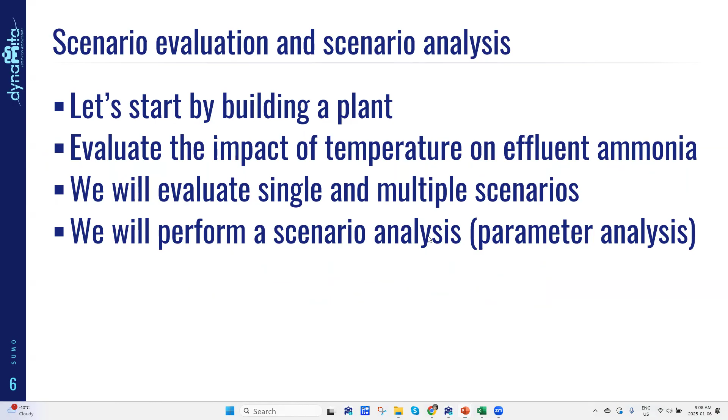All right, I have SUMO24 open on my side. I hope everybody can see it. Let me just get a few more people in.

The first thing I want to point to people is regarding the Wiki page. So if you open Sumo, you'll see that in the documentation tab we have a Wiki page. If you click on this Wiki page, it opens up a website. We try to keep this website as current as possible. If you're still using Sumo22, the documentation for Sumo22 will be available as a PDF right here. However, if you want to know what's new in Sumo24, that information is available. If you want to look in detail at the advanced simulation features we've included, that's right here. All the information regarding the new models, which I'll be touching on, is provided as part of this document. So I highly recommend looking at this document when you have time.

Okay, going back to the simulator - we have introduced this new tab at the bottom where we used to have one tab with all of our examples. Now we've created different tabs with dedicated examples. You can see, in the advanced mode, we have some examples that talk about the advanced features. All right, so let's go to the configure tab. In the configure tab, we'll start building a plant, and we'll build an MLE configuration to begin with, so I'll go to the flow elements.

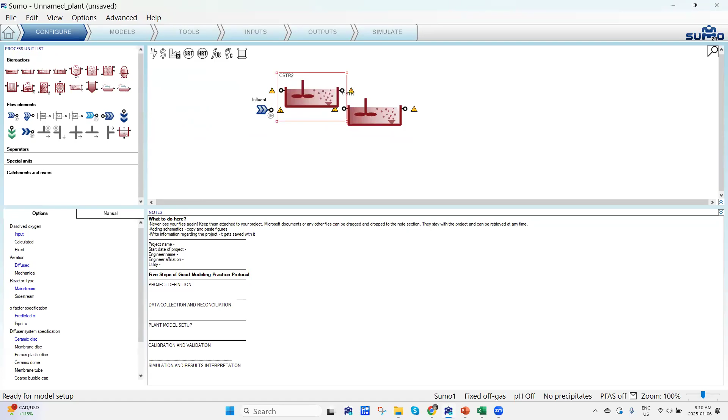I'll go to the separators and drag a primary clarifier, place it right after the influent, grab a secondary clarifier, an effluent port, and get a side flow divider so that I can recycle the nitrified mixed liquor from this tank.

I'll basically connect the CSTRs right here. I'll recycle the RAS back to the head of the CSTR, but I need a divider to waste my sludge. So I'm going to bring in a divider, turn it around, and then connect that divider to the input.

I'll use a side flow combiner, right click, and do a mirror up down. And then essentially let my primary effluent go into... I'll connect the influent to the primary input port, and then a sludge line right here.

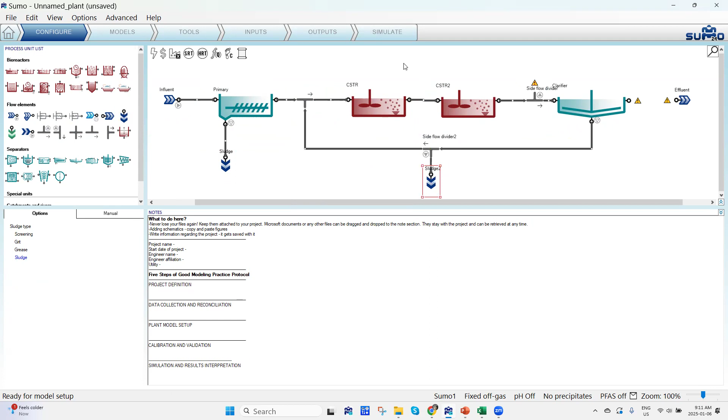What I'm missing is a divider which connects the recycled flow. So I'm going to just disconnect this pipe, right click, disconnect. And then I'm going to bring another side flow combiner and place that right in the middle.

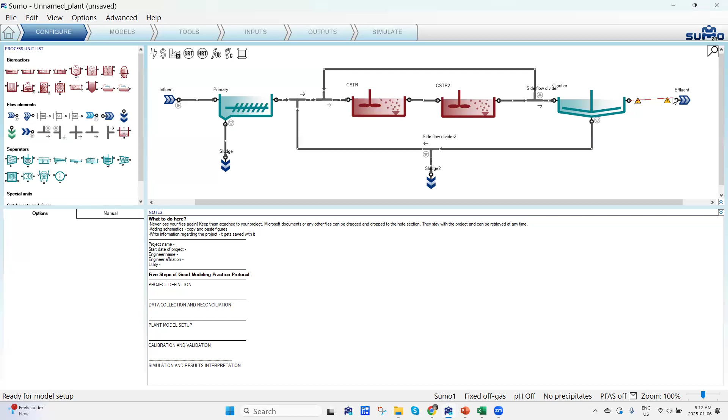So we have an MLE configuration setup. I'm going to click on the first CSTR and make sure I select the calculated dissolved oxygen model option. This model option will allow me to turn the airflow to 0 as an input so that there is no DO in the anaerobic reactor.

I will go over to my model tab. In the model tab, I have two-step nitrification, denitrification model selected as an input. If I scroll down, we have introduced a new option called micropollutants, where you can look at PFAS. So currently PFAS are not considered, but if I turn it on, then PFAS will be part of this influent model, and you can specify the PFAS concentration, and then you can track PFAS through the plant.

Let's go over to the tool. In the tools tab, we'll create an SRT calculation. So I'll click on the sludge retention time. I'll drag the two CSTRs to the numerator, and then the wastage or the divider along with the effluent solids to the denominator of this equation. And this allows me to create a total SRT calculation.

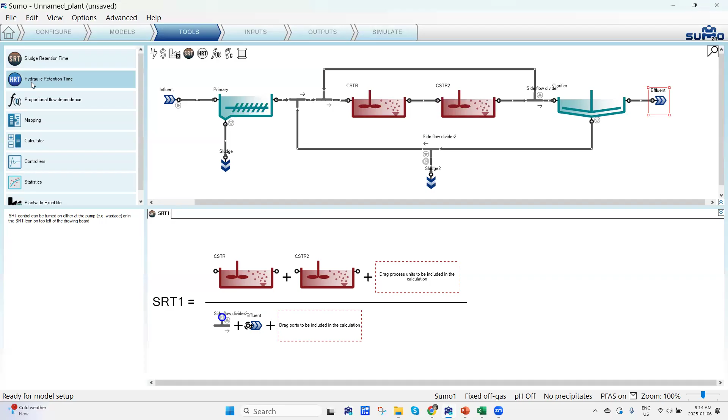Similar to the sludge retention time, we have introduced an option to calculate the hydraulic retention time as well. So if I click on the hydraulic retention time, I can select my reactor and then specify the influent at the bottom. And this allows me to calculate the actual design HRT of the system.

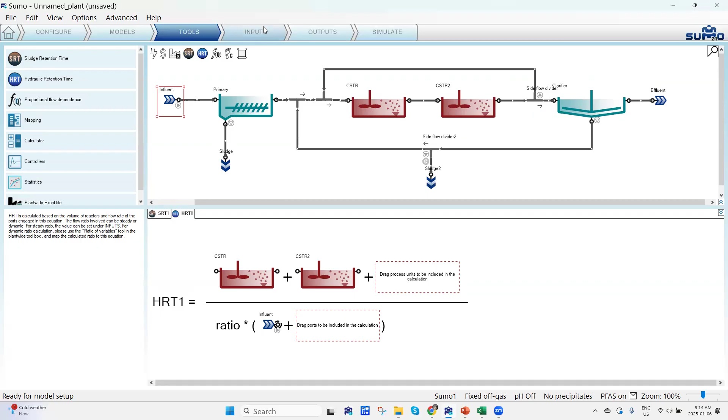Let's go to the input setup. In the input, if I click on my influent, and then on the left-hand side bottom, if I click on show all, go to other influent components. At the bottom, there is information which you can provide regarding the PFAS option, which we just switched on in the model tab. So if you want to specify PFAS in the influent and look at what happens when it goes through the plant, then you can provide PFAS as an input right here.

Now I'll provide volumes to my CSTRs. So the first CSTR is an anaerobic tank or an anoxic tank. I'm just gonna name it anoxic. The second is aerobic. I'm gonna rename that one.

For the anoxic tank, I'm gonna choose a volume of 3,000 cubic meter. We're dealing with SI units because we have people from all around the world joining us today. Specifically for people in the US, you can go to the options, unit system, and then select US units. So I changed the volume in the anoxic tank to 3,000 cubic meter.

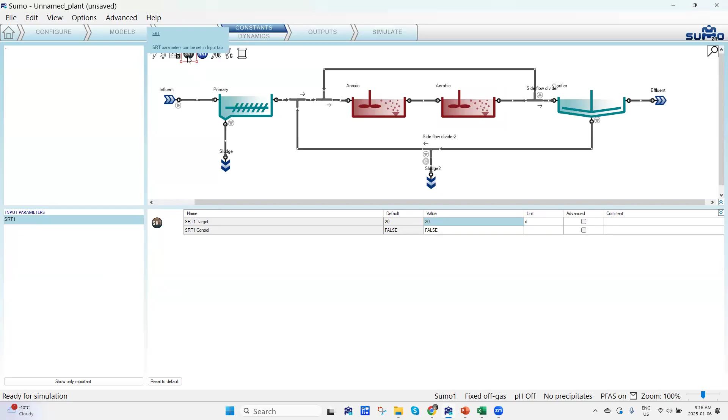I can click on my SRT on top of my drawing board, and this is the SRT calculation which we just created. I'm gonna turn on the controller so that I don't have to specify the wastage, but I can provide an SRT value, let's say of 5 days, and the wastage will be calculated by the model.

I can go to my side flow divider, although I can control this as well using the proportional flow dependence option in the tools. For now, I'll just provide a flow rate of 72,000 cubic meters per day.

Before we move on, I'd like to go back to my influent. Because this exercise is about some of the new features in SUMO, I want you to look at this advanced column. This advanced column exists for all of the process units, and it also exists for the model parameters. So if I go back to model parameter and click on my key parameters, you can see there's an advanced option, advanced column, where I can select any of these parameters. So wherever you see this option, you can select that as an advanced scenario.

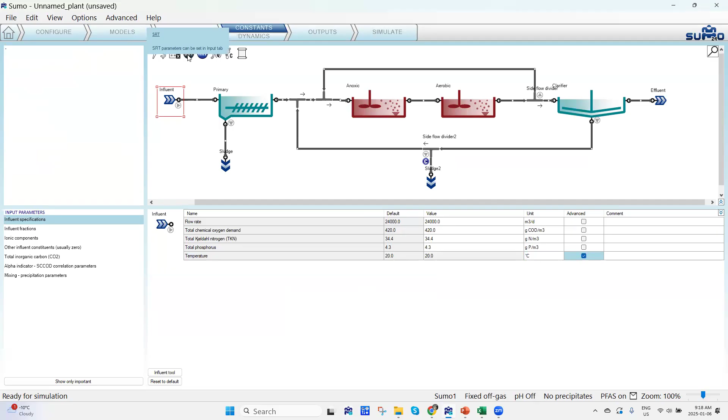I'm going to do the same thing for the SRT. I'm going to go to the SRT and select my SRT target as part of the advanced. This, when I go to the simulate tab, allows me to bring the scenario, the parameters or variables which I've selected, into my simulate tab.

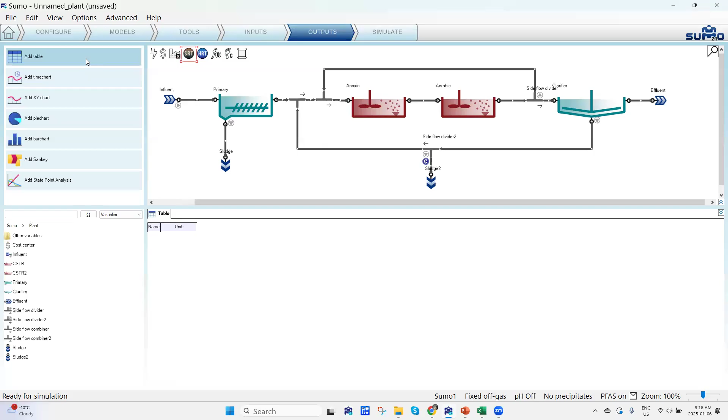But let's prepare a table and a time chart first. I'm going to go back to the output setup, add a table, click on my influent, and simply drag the frequently used variable to the right. I'll do the same thing for the anoxic tank by dragging it to the bottom, and the same for the aerobic tank and for my final effluent.

I'd also like to make sure my SRT is correct, so I'm going to click on my SRT while in the output tab, go to other variables, click on the SRT, and drag it to the right. Currently it's 30 days because I haven't run the simulation yet.

We have consolidated the two tabs we had. Previously, we had a steady state tab where you would calculate steady state, and a dynamic tab where you would either do a dynamic run or a steady state start, which is a steady state run plus the dynamic run. We've consolidated the two tabs into these dials. This red button is the dynamic run start, the circular button is the steady state, and the combination of the two, which looks something like this, is the steady state start.

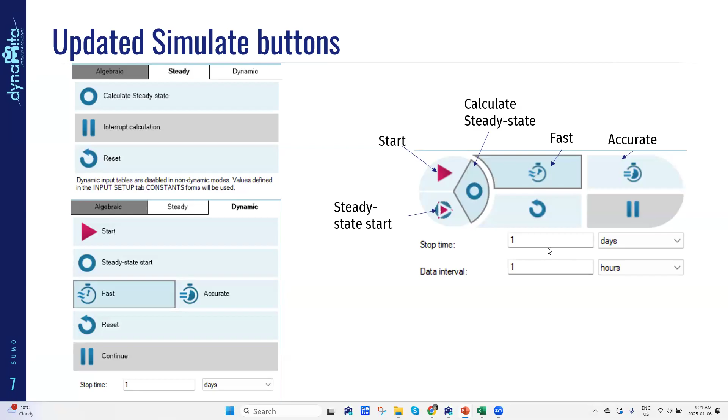Okay, so let's go back and let's create a time chart as well. I'm going to go to the output, add a time chart for effluent nitrogen concentration. I'm going to click on my effluent, nitrogen components, and get ammonia, nitrate, and nitrite. I'm going to rename this N in effluent.

I'm also going to create a time chart for mixed liquor. I'm going to click on my aerobic tank, and from the left-hand side grab my TSS, MLSS, and rename the time chart.

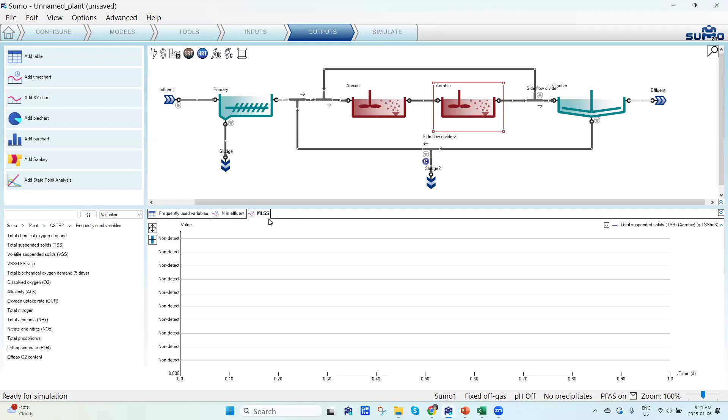All right, so let's go to the simulate tab and I'm going to press the steady state start button. Okay, so it did a steady state run plus one day of dynamic run using the parameters we specified here. We just want to make sure our SRT was 5 days, so we can go back to the frequently used table. Okay, it's 5 days. We can look at our mixed liquor concentration, close to 1200 milligrams per liter.

All right, and our temperature is 20 degrees Celsius. Now let's do a scenario evaluation where we create another scenario and change the temperature from 20 degrees Celsius to, let's say, 15 degrees Celsius.

But before we do the simulation, we have to make sure the boxes next to these tabs are checked. Right now, the only one checked is this default scenario. So if I uncheck this for a second and try to press any of the buttons, it says select scenario. So I'm going to say okay, I'll do scenario number 1. I'm going to check scenario number 1 and redo the simulation using steady state start.

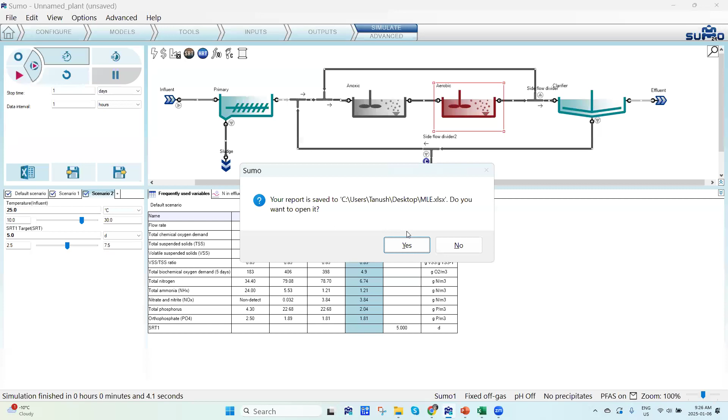Now, once we are done with this evaluation, we can simply create a report. So if I create this report, name it MLE, all the information regarding the scenario runs will be part of this report. If I go to the modified parameters, you would have the information regarding the 3 scenarios which we set up. You have the values which we changed.

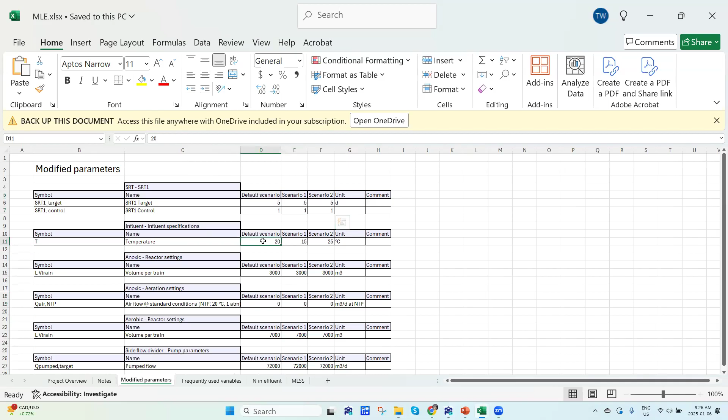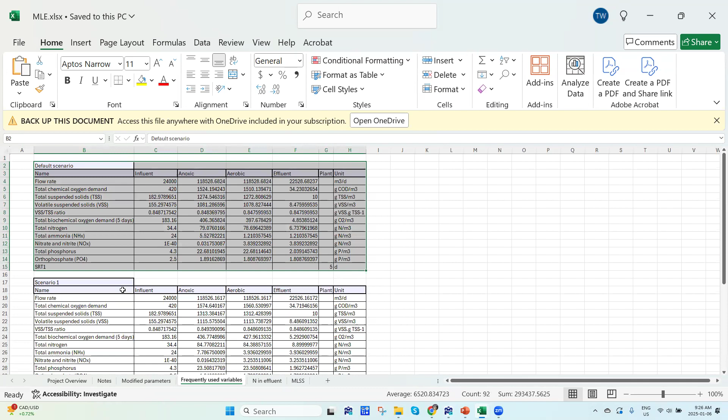And if I go to the frequently used table, you will have outputs for all these scenarios. Even for a time chart, you can see that we would have that information available for all the scenarios. So it allows you to do post analysis of all your scenarios which you have run quite easily from one Excel file. All right, I'm going to close this. I'm going to go back to

SUMO. And now I'm going to show another advanced feature of SUMO. So right now you can see we are in the Simulate tab. The Simulate tab has been divided into what we used to call Simulate and an Advanced tab. So if I click on the Advanced, you can see that the tabs look a bit different. And in each tab, there is this drop-down menu which says either you should analyze or you should optimize.

And before we get into optimize, let's do an analyze. What does analyze do? And how is it different from a scenario evaluation, which we just did? So in scenario evaluation, we created multiple tabs and we set the values to whatever we wanted. So it's a fixed value. However, when we are dealing with the analyze, you can think of it as a sensitivity analysis, as a parameter analysis. So let's see what happens if I select temperature as a variable for doing a sensitivity analysis in this simulation. I get an option of defining what my range is.

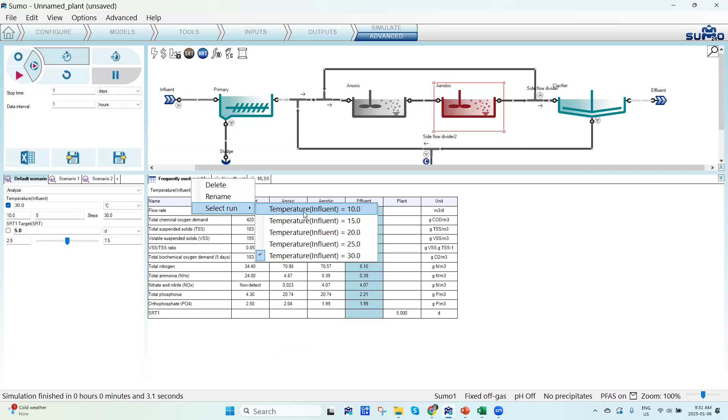So for example, right now we are looking at a table where the temperature was set to 30 degrees Celsius. If I right click, go to select run, you can see that I have 5 options here. So I can go and see what is my ammonia concentration in this table when the temperature is set to 10 degrees Celsius. Okay, that's what that is.

Nice. All right. So let's reverse this a little bit, because a lot of times we want to look at what is the minimum SRT to operate a plant at, let's say, 10 degrees Celsius of temperature. So instead of selecting temperature, let me select SRT for a change. And I'm going to vary the SRT from, let's say, 3 days of SRT to 15 days of SRT. And I want SUMO to do 10 simulations in between.

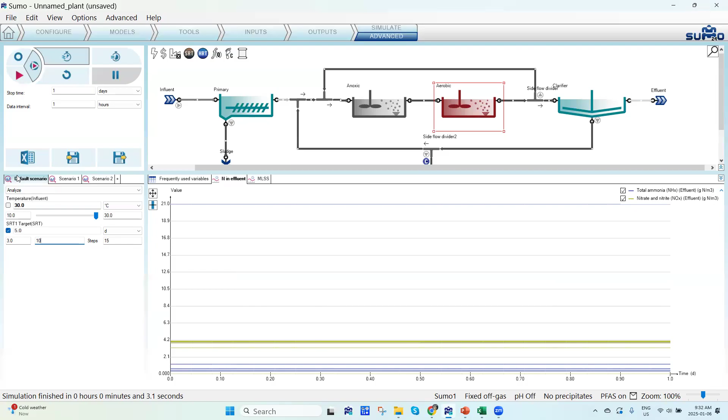And I want to look at that beautiful graph of the XY chart. So I'm going to select just one parameter and I'm going to do a steady state run. Okay. So I'm looking at 30 degrees Celsius, obviously. The simulation is already complete, actually. Maybe one more. All right. So I'm going to change the temperature here, not to 30 degrees, to 10 degrees Celsius and redo this run.

All right. So that's what I wanted to see. Up to 5 days, 5.5 days, no ammonia removal. You start to see ammonia removal a little bit as the SRT goes up. And then obviously, after 8 days of SRT at 10 degrees Celsius for this plant, you start to see nitrification happening.

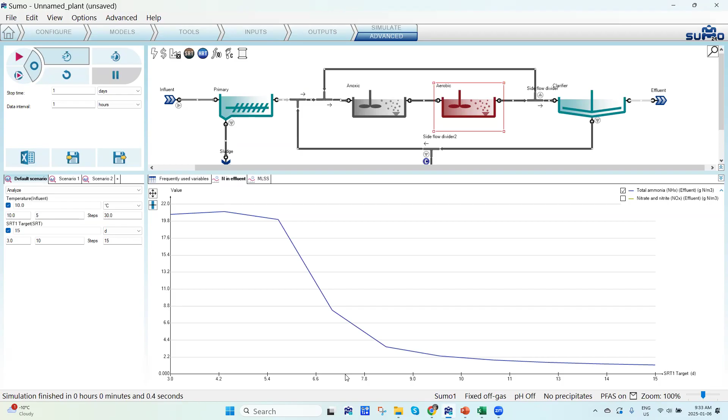And then you don't even have to choose one or the other. You can actually do multiple scenario evaluation analysis as well. So by selecting these both, you can multiply the number of simulations you're doing, and then all of those simulations will show up as part of your simulation page. Now we look at that in a different example. So I'm going to close this example for a second. Maybe I can save it to my computer called MLE. That's it. Okay.

So the next simulation we are going to look at is the state point analysis. Now, state point analysis is a convenient way to visualize or to determine the operating condition of a clarifier. This point, which is the operational point of the clarifier, is the intersection between the overflow rate and the underflow rate. So now let's make this graph in SUMO while doing some scenario evaluation.

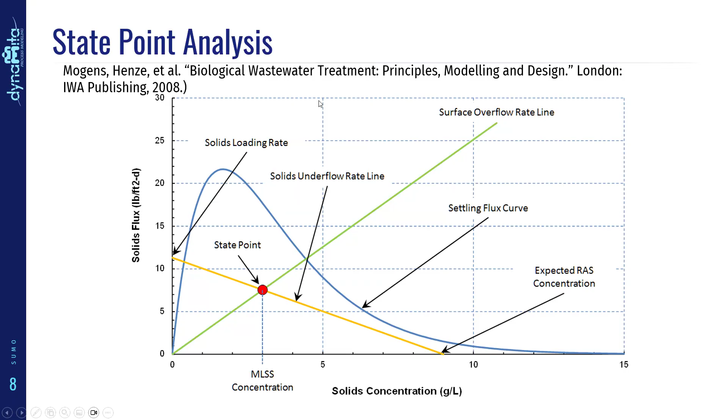We'll use the hydraulic SRT example, and we'll create 3 different scenarios and run 3 days from steady state. We'll look at a scenario where both the solids handling criteria are observed. Scenario 2 will be where solids handling criteria 1 fails. There is not enough underflow to remove the solids from the clarifier. And scenario 3 will be SHC2 failure, which is the solids handling criteria 2 failure. There is too much solids load in the clarifier.

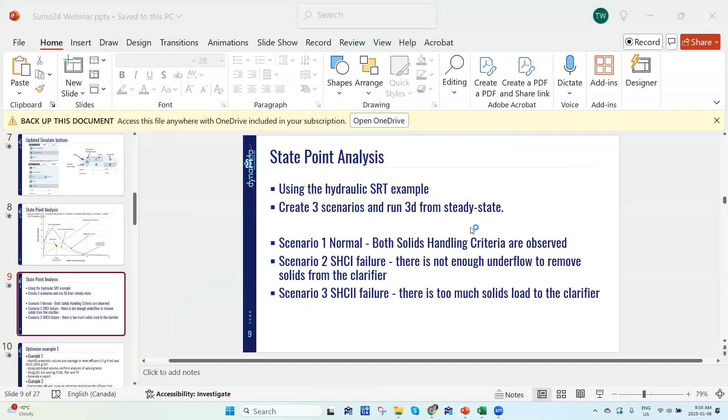Now we can do all these 3 simulations simultaneously, as you saw in a previous example. But we look at the SPA, or the state point analysis graph. For that, I'll go back to SUMO. I'm going to open the hydraulic SRT example. And in the Configure tab, I will select the clarifier. When you click on the clarifier, on the left-hand side in the Configure tab, you would notice that we have a few new options, such as high efficiency clarifier. But for now, I'm going to select the layered flux model, because the layered flux model is where the state point analysis can be performed.

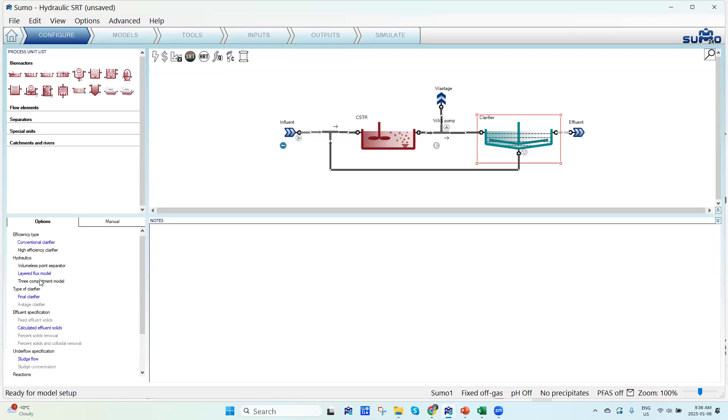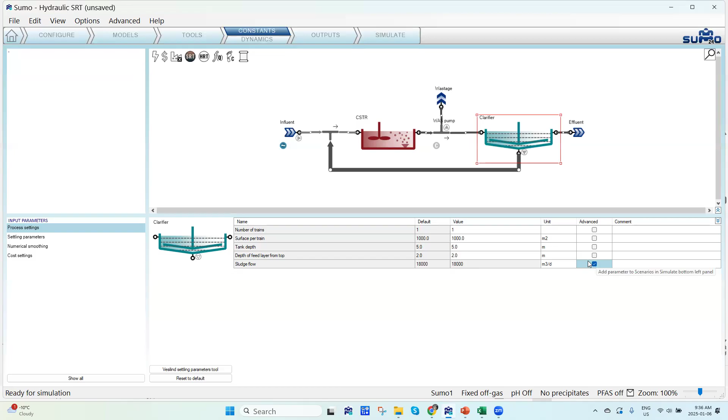I'll directly go over to the input. In the input, for me to do a scenario evaluation for the state point analysis, I would click on my clarifier and select the underflow of the sludge as part of the advanced option here. I'm going to do the same thing for the wastage as well. So I'm going to click on this waste pump and check this advanced button.

Now let's go over to the output setup. In the output setup, you'll notice at the bottom, we have the state point analysis graph. When you click on it, you can drag and drop any layered flux clarifier to the chart. And this will allow you to do a state point analysis. I would also create a time chart for the sludge blanket. So double click.

Rename it, go to the operational. And from the operational, I'm going to get the sludge blanket height. I can also create a bar chart to look at the TSS concentration profile in the clarifier, and rename it to solids in the clarifier. Now, let's go to the Simulate tab.

In the Simulate tab, I have a default scenario. I'm going to create another scenario. Make sure I check this button because I want to do all three simulations at the same time. I'm going to rename this to SHC1. Check. Make sure it's checked.

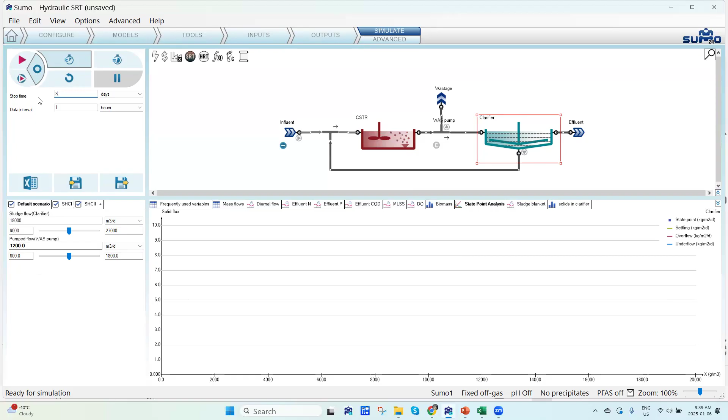So I'm going to go to my simulate and simply press steady state. I'm going to do a 3-day run, like I said. So I'm going to change the stop time to 3 days and then press steady state start. So using the settling curve, this is the green line. Then we have the overflow as the red line. The underflow is the blue line, and the intersection is the state point analysis.

And you can see that Sumo keeps track of the simulation it's doing. So it's 1 out of 3 simulation, then it's 2 out of 3 simulation. And hopefully soon it'll be the 3 out of 3 simulation. Okay. One more to go.

And all these scenario evaluations and all these sensitivity analysis which we looked at happen from the previous state of simulation. So they all are evaluated based on starting from the same time point. Okay, so this is where obviously we won't want to be.

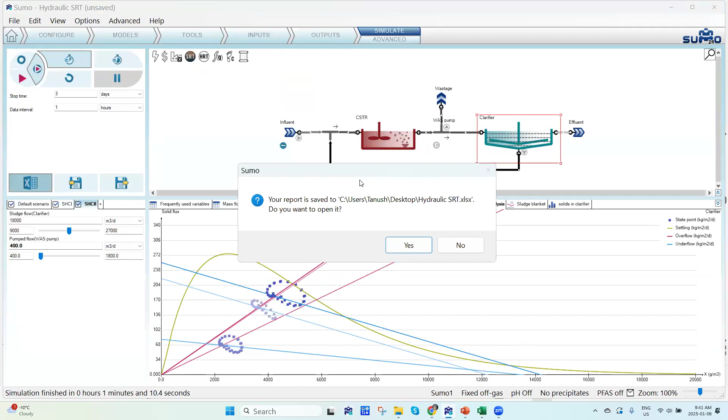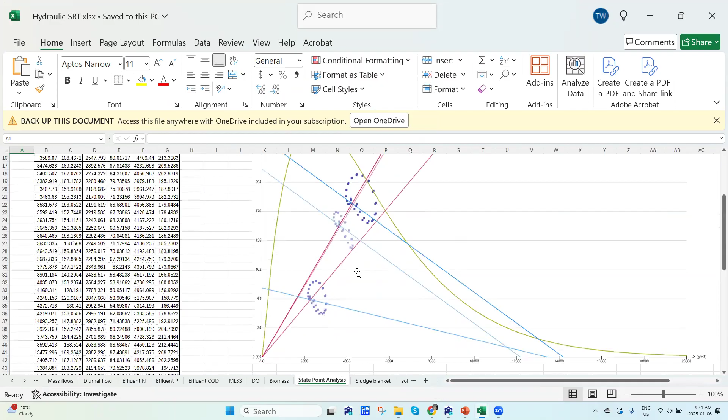And now if I go and press on the report and save this report, you should have information regarding the SPA in this time chart as well. You can look at the sludge blanket for all the 3 scenarios and then look at solids in the clarifier for all the 3 cases as well. All right.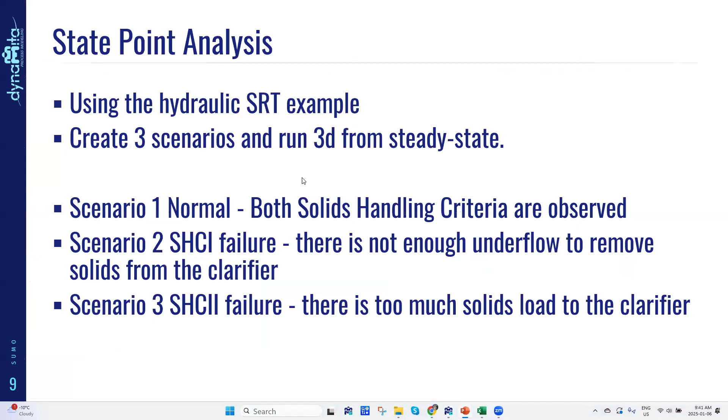So I'm going to go back and move on to our next exciting feature, which is the optimizer. So in the optimizer, you can use this feature to do a design. You can use this feature to fractionate your influent, and then you can use this feature to identify kinetic parameters if you have a data set and you want to calibrate it.

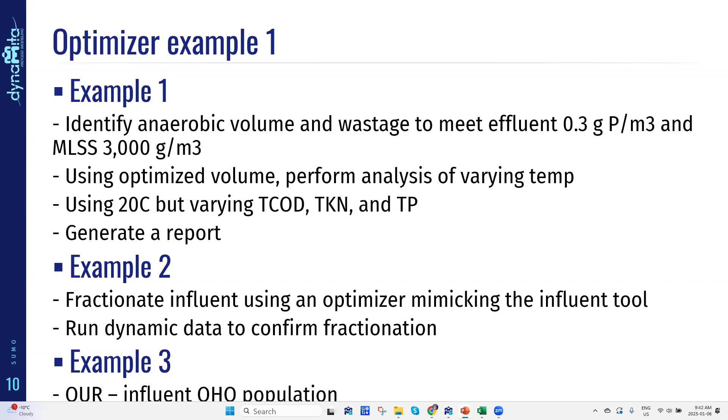So we'll start with the first example. The first example is we use an MLE configuration and then we convert it into an A2O plant. And we want Sumo to tell us what is the volume and what is the wastage so that the mixed liquor target is met and the effluent quality is met. So I'm going to go back to Sumo and open the MLE configuration from my nutrient removal tab in the examples.

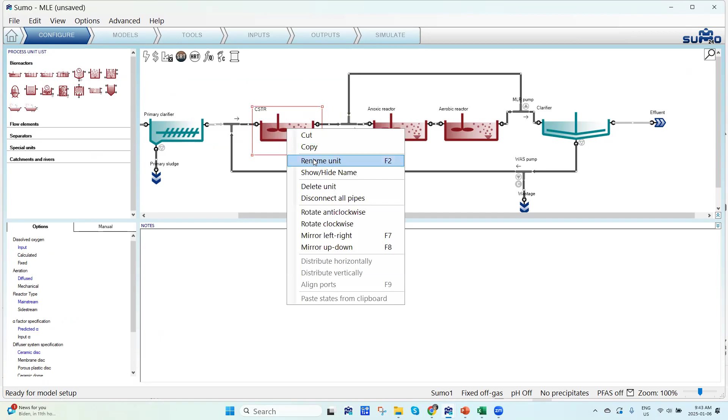I'm going to press no. All right. So I'm going to use this example. I'm going to add a tank right before the internal recycle. Right click, disconnect. I'll bring a CSTR. I'm going to right click and rename it to anaerobic. I'll select a calculated DO reactor.

Next, I'll go over to the tools. In the tools, I'll go to total SRT and update my SRT calculation by adding an anaerobic tank. I'll go over to the input. In the input, I'll click on my anaerobic tank because that's what I want to design.

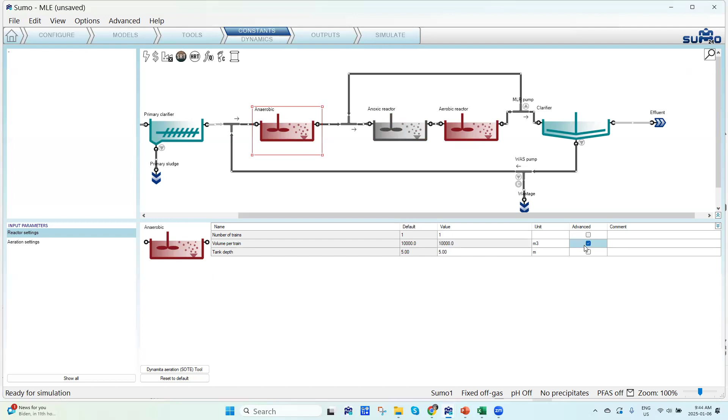And what do I want to design? I want SUMO to tell me what the volume is so that I can meet my effluent requirement of 0.3 milligram OP per liter. So I'm gonna select the volume for advanced. What else do I want to choose? I want to choose my wastage because when the volume is being optimized, obviously my mixed liquor keeps changing. So I want to make sure I have a target for my mixed liquor.

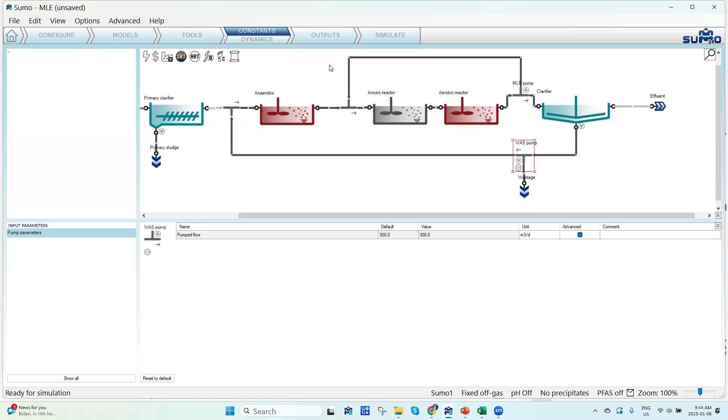So I'm gonna go to my WAS pump, click on the advanced button, and both volume and my WAS are now part of the simulation. So I'll go to my output. I want to make a time chart for PAOs and GAOs. So I'm going to make a time chart here, call it PAO and GAO, so I can keep track of them during the simulation.

So I'm going to click on the anaerobic tank, go to the active biomass and drag phosphorus accumulating and glycogen accumulating organisms.

Next, I'll go to the simulate tab and then go to the advanced. All right, this is where the fun begins. So I go over to my optimize option on the left from the drop down. And you can see that a new table appears. And in this table, we have to define a variable. We have to provide a target for that variable.

And then there are other important things as well, such as units of those variables and values which are automatically populated. There is weight. Sometimes one variable is more important to meet the target for, so you can do that. And then you can choose the error function which you want to use for your simulation.

All right. So what do we want to optimize, or what is our target? Our target is to have an effluent orthophosphate. So I'm going to go to a time chart. Now you don't have to necessarily go to a time chart. You can actually go back to the output and drag the orthophosphate in the effluent to that table, which you see. But right now I'm going to show you two ways.

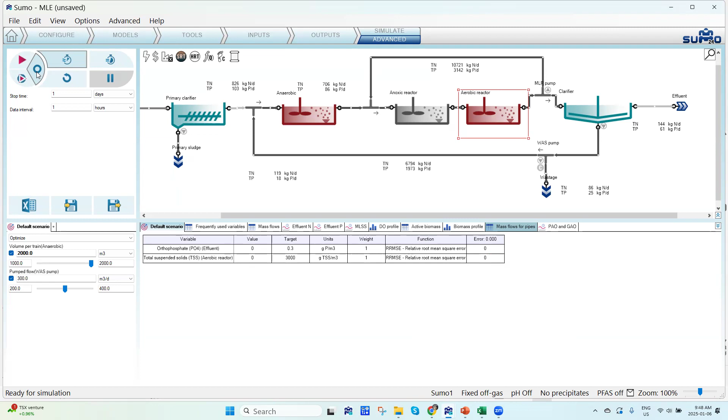And then you can right click on the function and choose different type of error options you want to choose. So right now I'm using relative root mean square error to minimize the error, meet the target, and identify volume and wastage. All right, I'm gonna go and click steady state.

Now SUMO will start doing a number of simulations. You can see it's at simulation number 2, 3, and it's working its way to identify what is the best volume and the wastage so that this criteria is met. Now, while the simulation is running, it could take up to a minute. We can provide additional weightage.

So if the targets which you have chosen are not complementary, sometimes you want to provide weightage for something which is more important. So you should think of this as providing more importance to a certain variable. So if I was to choose an absolute root mean error, maybe I want to provide a higher weightage to my orthophosphate because it's more important for me to meet my orthophosphate target than to meet my mixed liquor concentration.

Well, I guess it didn't work out as I expected because I forgot to turn off the aeration in my anaerobic reactor. So I'm going to go back, change my airflow to 0, and do the steady state again. And hopefully this time it's going to be able to meet that target. I was sure I was forgetting something.

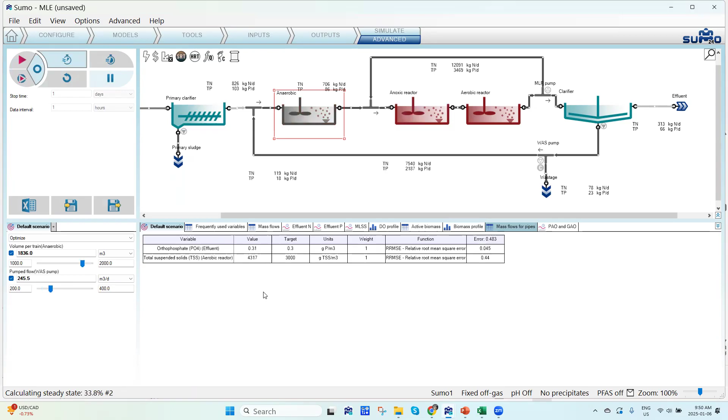Okay, you can see that it's getting closer and closer to our target. And obviously we can stop the simulation at any time, but we will let this one reach the target set point.

Yep, quite close. While the simulation is running, I'm going to go back and re-emphasize that you can always go to the Wiki page. In the Wiki page, you can go to the advanced simulation, and you can go through step by step how to set things up and how to run the scenario evaluations or scenario analysis.

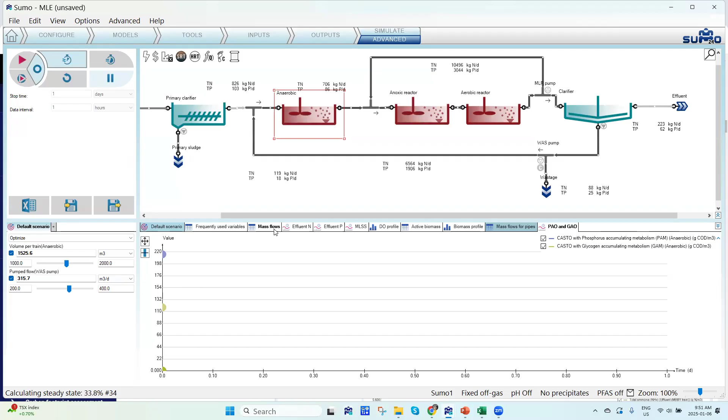We can go and see what's happening to PAOs and GAOs. You can see that it's dancing around a bit, trying to figure out what is the value where they should be. Okay, I think that's close enough. Getting very close. So we don't have to get precisely close to that.

Okay, so the simulation is done. And the answer we got was a volume of 1497 cubic meters and 332. Yes, as engineers, we know that we don't have to get precisely the exact same number as the target. But even then, I let it go. Now, what do I do with it next? So once we have identified the volume, we can use the same volume and the wastage to do further evaluation.

For example, will this give me the same amount of orthophosphate when I change the temperature? I can go back to my input, click on my influent, select my temperature, come back to simulate, and instead of doing optimize, I can do an analyze. I can uncheck the volume and my wastage. And you can see that Sumo will keep this volume and this wastage, which the model identified.

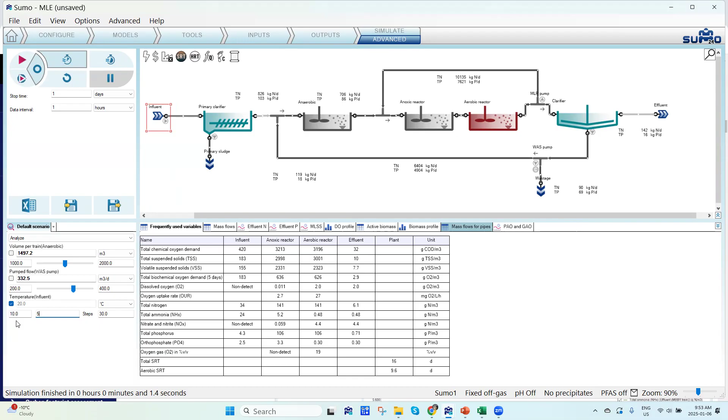I'm going to click on my temperature, and I'm going to do 5 simulations between 10 degrees Celsius and 30 degrees Celsius at steady state by clicking on this button. And I will look at the impact on PAOs and GAOs. All right. So you can see how PAOs are going down as the high temperature is reached and GAOs are taking over. I can look at the impact of this at steady state on my orthophosphate as well.

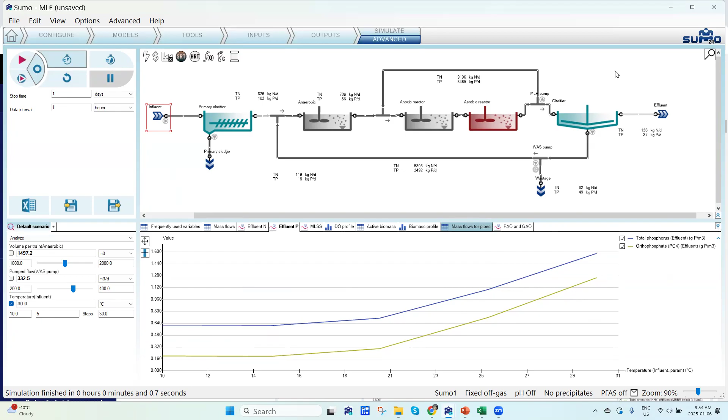So as the temperature is changing, remember, when we did steady state with the analyze of one variable, it allows you to change a time chart into an XY chart. And now you can do more simulations if you like using the same values. All right. I'm going to close this simulation and I'm going to go over to the next one.

So the next simulation which I have prepared is to fractionate the influent using an optimizer mimicking the influent tool. And then I'm going to run dynamic data to confirm the fractionation. So this will probably be my last example, and I won't get into example number 3 given the time we have. And then we'll talk about digital twins a little bit.

Okay, so I'm going to go back to Sumo. I'm going to click on the Configure tab, maybe open a new file. I'll open a new project. Configure. I'm going to drag and drop the influent. I'm going to go to my input and open up the influent tool.

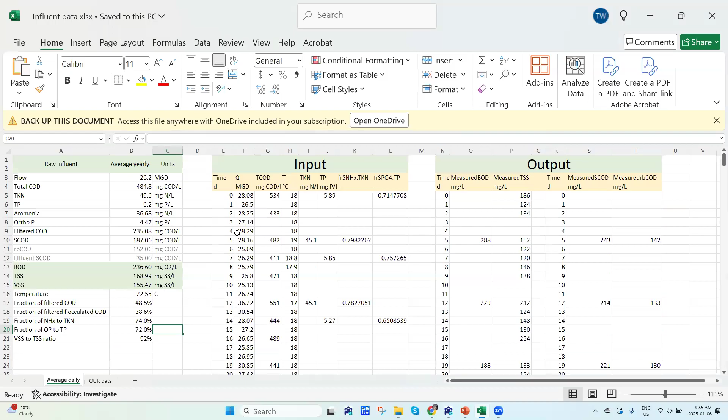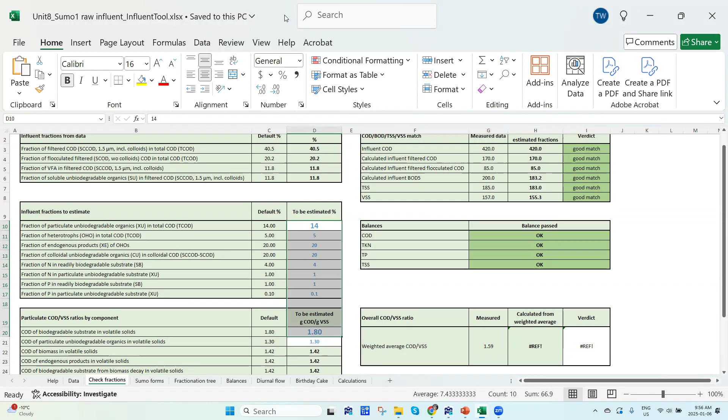Now, the main purpose behind using the influent tool is to provide the data you collect from your lab and then go over to the check fractions and be able to identify what your TSS is, what your VSS is, and BOD is by estimating how these fractions are changing. And we'll set up this exact example for the optimizer. So I have plant data from a plant, and I'm going to bring that over to Sumo. So I'm going to copy the total COD, TKN, and total phosphorus like we would in the influent tool.

Then I would need the VSS to TSS ratio, which is again data from the plant. I'm going to go to my influent fraction and say my VSS to TSS is 92%. My filtered COD and filtered flocculated COD, again, is data from the plant. So I'm going to say 48.5% and 38.6%. And the other two remaining are the ammonia to TKN and orthophosphate to TP, which are 74 and 72%.

So exactly how we would fractionate using an influent tool, I would highlight and select some of the important parameters. So which ones were they? Let's go back to the tool. In the tool, you can see we have particulate unbiodegradable organics, fraction of OHO. I'm going to skip the endogenous decay product because it's a small fraction. Then the colloidal unbiodegradable portion, the nitrogen and phosphorus content. Okay, so I'm going to go back and select these 7 to be part of my fractionation scheme.

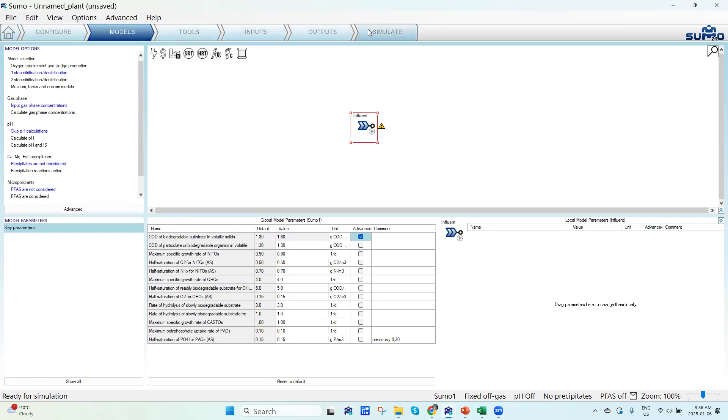I can also go to the model parameter, which is the COD to VSS ratio, and select that as part of the advanced as well. Now, coming back to the Simulate tab, we would have to go to the advanced option.

From the drop-down menu, select Optimize. And what are we optimizing? In the Influent tool, we saw we want to optimize for BOD, TSS, and VSS.

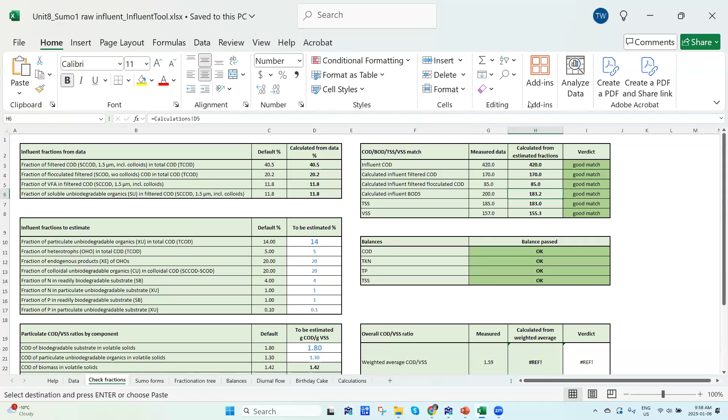So we'll do the exact same thing. I'm going to go to the output setup, click on the Influent. From the frequently used variables, I'm going to get TSS, VSS, and BOD.

And I'm going to provide my target. So if I look at my data set, my target for BOD is 236, 169, and 155. So I'm going to type in 236, 169, and 155.

I'm going to go back to simulate, in the advanced tab. When I have optimize selected, I'm going to select all these parameters which I want to optimize.

Or identify. One thing we have to make sure is that the range which we specify should make sense. So I'm going to limit this to 2 and 1.6 - the COD to VSS ratio of particulate biodegradable substrate. And I'm also going to limit the phosphorus fraction of the readily biodegradable substrate from 1.5 to just 0.5.

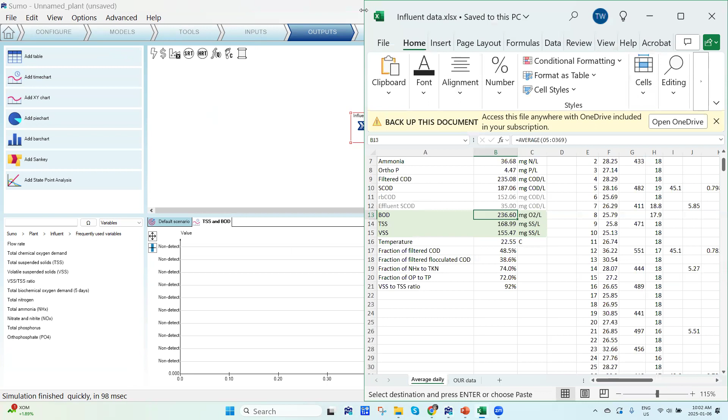I would copy this data from this Excel file, TSS and BOD, go back to SUMO, right-click on the header and import that data by pasting and pressing OK.

So that's 365 days of data, which we'll simulate. I'll go back to simulate. I'll make sure that I'm no longer in the advanced tab, but in the simulate tab. And I'm going to do 365 days of dynamic simulation.

But I need to plot my TSS and BOD as well. So I'm going to go to the output and get the TSS and BOD for the influent, go back to simulate and press start.

So eyeballing it, you can see that the TSS and BOD are quite well reproduced using the estimated fractions. Now I can go a little further and add a dynamic influent on top of this to see if it reproduces the BOD and TSS.

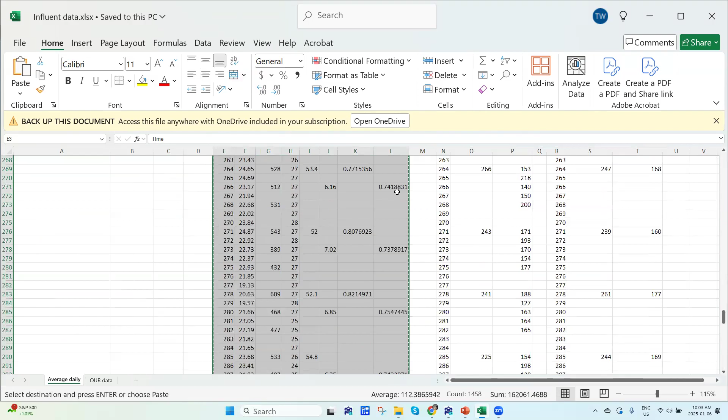So I'm going to copy the dynamic data, go back to SUMO, go to the input, dynamic, and paste the table.

And now if I redo the simulation of 365 days, you can see that it's a better fit based on the fractions we have just identified.

So this would be another application for the optimizer, which allows you to fractionate on the fly using these advanced features.

All right, I'm not going to get into our third example, but basically you can use the optimizer feature to identify parameters using a dynamic data set as well. And we'll create a short video and upload it to YouTube for this example.

So if I have to summarize the difference between scenario evaluation, scenario analysis, and optimizer: in general, the simulate tab, which in SUMO24 and now even now we have, allows you to change values from the input tab and then individually run simulation. However, if you select the advanced check button next to any parameter or variable, then you can create a scenario evaluation where you can do single or multiple scenario tabs and run them individually or all at the same time.

You can do a scenario analysis where you can look at the sensitivity and the parameter analysis, or do a sensitivity analysis based on a parameter and decide a range of values where you want to do the simulation and provide the number of intervals. And all of them can be executed at the same time.

And for the optimizer, you decide a target value, provide a value, and then the variables to optimize, and then you run the optimizer to achieve that target.

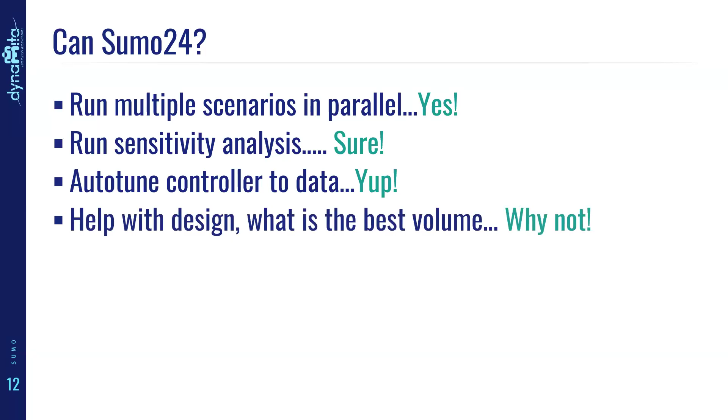Can we use SUMO optimizer for design? Yes, of course, why not? Can we use it to minimize aeration demand and maximize energy production? Can you set up an optimizer for that? Of course we can, and there's an example for both of those as part of the examples tab on SUMO's homepage. And finally, can we identify kinetic parameters for batch tests? Yes, we can.

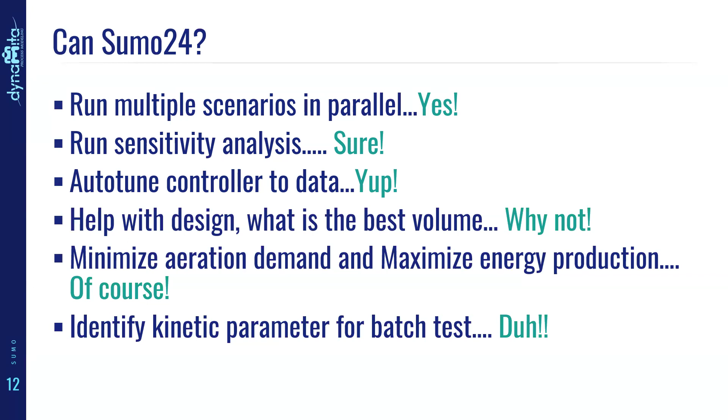All right, let's talk about digital twins a little bit. SUMO, which is a digital twin toolkit, allows us to create two different applications. One is the digital twin application, which is essentially an online representation connected to a real system to gather, store, and simulate live performance. The other application of this toolkit is to be able to create applications that automate our modeling tasks.

So some of the key points about the capabilities of SUMO and the digital twin toolkit are that SUMO can receive information or data and can send out information and data. It can receive information from an OPC server, SCADA, other databases, or other SUMO files as well. That means you can run SUMO files consecutively, in series or in parallel, however you want to set it up.

And SUMO can send data out to, again, OPC, SCADA, database, other SUMO files. How do you create this communication channel? You can use Python or C++, write a script, and it'll allow you to send data from SUMO and into SUMO. It could be a web application, a cloud application, or a local server. It doesn't matter where the application is.

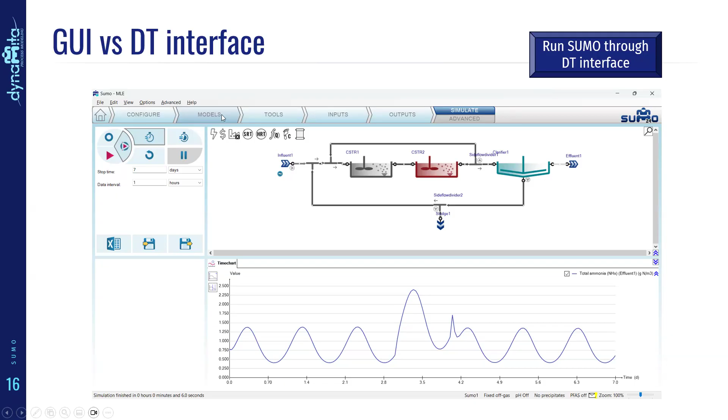And you can create your own user interface if you want, and in the background you could have it running. So one of the examples is right here. In this slide, I'm showing a simulation done in the interface of dynamic influent of ammonia in this MLE configuration. If I click on this button, so this is a simple Microsoft PowerPoint-based interface, let's say.

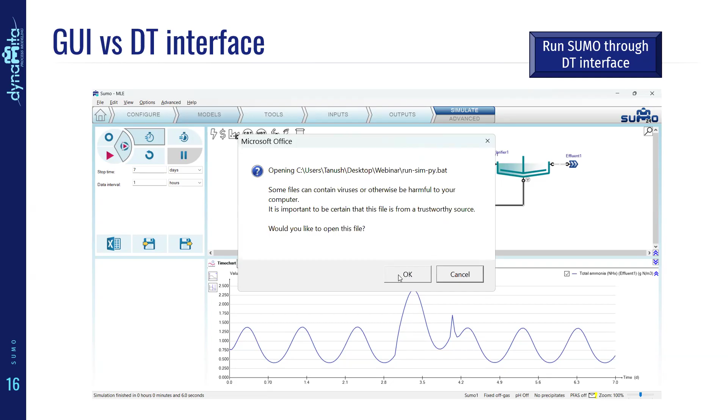If I click on this button, it will ask me, do I want to run this simulation using Python? I say okay. And then the simulation is run in Python, and it spits out this graph. This graph is exactly the same as what you see in the PowerPoint. So this is a simple application of creating different interfaces using Python.

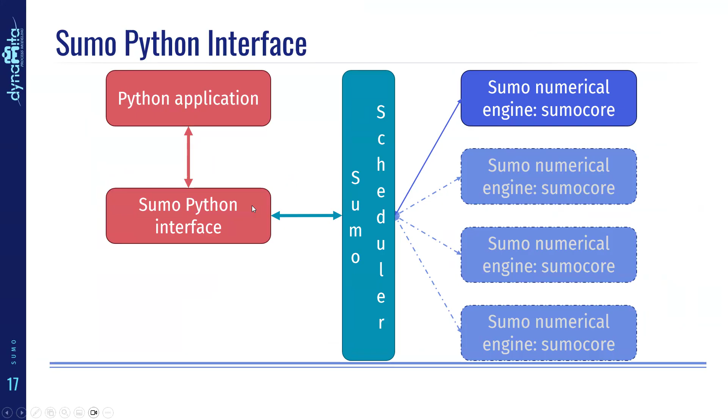So how does it work? You create a Python script, you interact with the SUMO scheduler, which is inside SUMO, and then you're able to run multiple simulations using the interface. And how to set this up: install the SUMO digital twin from the website, install Python, and set up the Python pathway for the environmental variable following the Wiki page.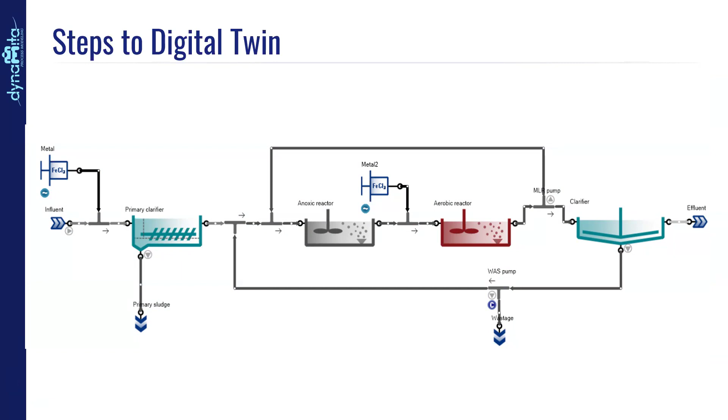So another new aspect of digital twin which we've introduced in SUMO is to simplify how to set it up. In this configuration, we identify these as the inputs which need to enter the model from the SCADA system: dosage, flow rate, COD, BOD, tank volumes, and so on. Then SUMO will give you the mixed liquor concentration, effluent COD, BOD. It might tell you more about the analytics which can be used, such as denitrification rate, the intrinsic data set of the model or predictions by the model, how much active fraction you have.

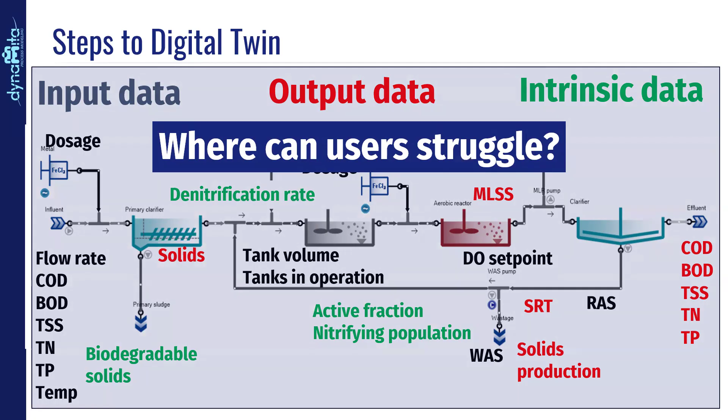But then, where can users struggle in setting up a digital twin? It's essentially identifying which data goes where in the model. We've simplified this by introducing a JSON exporter. JSON is JavaScript object notation, and we've created an extractor. If you create a configuration in SUMO, with the click of a button, you can create a JSON file. This JSON file will contain all the information regarding all the parameters and variables which are part of that configuration.

So for example, right here you can see a full symbol for dissolved oxygen set point in the CSTR. This full symbol can be used by you to develop an application to send data about the DO set point into SUMO, run SUMO, and then get information out. So all of that process unit names, symbols, the variable names and variable symbols are available in this JSON file. Processing this JSON file and SUMO24 through Python can allow you to create digital twins or other modeling applications.

Here is an example of how we have used it for HRSD, for one of their facilities, which is the Nansemond digital twin, a Nansemond facility.

In our digital twin application, we get the data from the OPC server, we clean it using some algorithm in Python. That data is sent to a SUMO interface where we are doing real-time simulation.

This plant or model file is auto-calibrated and sensitivity analysis is done on a weekly basis to identify the correct SRT and wastage. And then from this model, we identify the mixed liquor composition.

The mixed liquor composition from this full plant model is then sent over to this mini model, which is also receiving information about the ammonia forecast, which is again developed using a Python script. This has been done by HRSD themselves - they have a Python script which predicts what the ammonia should be 2 hours from now.

That information, along with the mixed liquor information from this full plant, allows us to do optimization and identify what the dissolved oxygen set point should be for the next 2 hours and how the plant should operate. Now that information is saved in the SCADA system or the OPC system, and is accessible if they want to use that information to operate the plant as well.

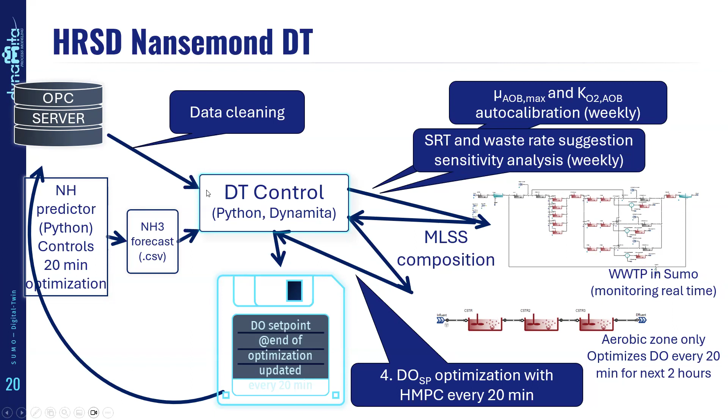Now, along with this, we have a dozen more use cases of the simulator. One reference I want to mention is the recent WRF report by Bruce Johnson on development of hybrid digital twins for predictive nutrient control. It contains a lot of good examples of how digital twins should be implemented for various facilities.

All right, I think we have a few more minutes and we can talk about some of the model updates we have achieved in SUMO24. The first one we want to talk about is the particulate biodegradable organics and the hydrolysis rate.

In SUMO22, the previous structure was that the particulate biodegradable organic from the influent gets hydrolyzed to form soluble biodegradable organics. Then eventually it gets oxidized by heterotrophs. And when the heterotrophs decay, part of it becomes XB. So previously we did not distinguish between the XB coming in from the influent and the XB generated in the process.

While now what we have is, we have XB which converts to SB, and the OHO, when they decay, they don't form XB, which is biodegradable particulate representing the influent, but rather XBE, which is the biodegradable particulate generated from this endogenous process. This XBE is further hydrolyzed to SB at a much slower rate. So we have two different rates and two different particulate biodegradable substrates, one representing the influent and the other representing what's produced by the biomass during decay.

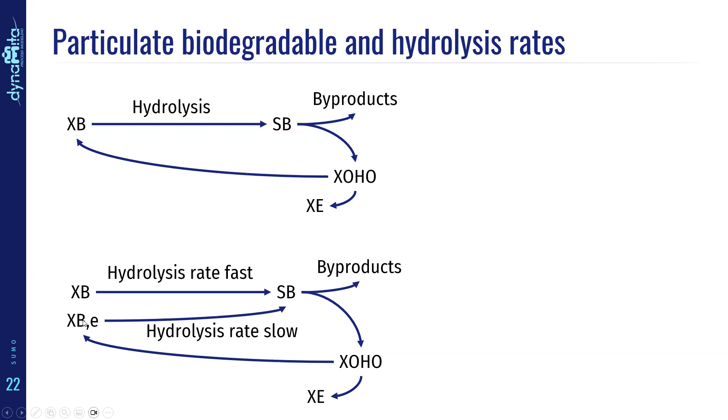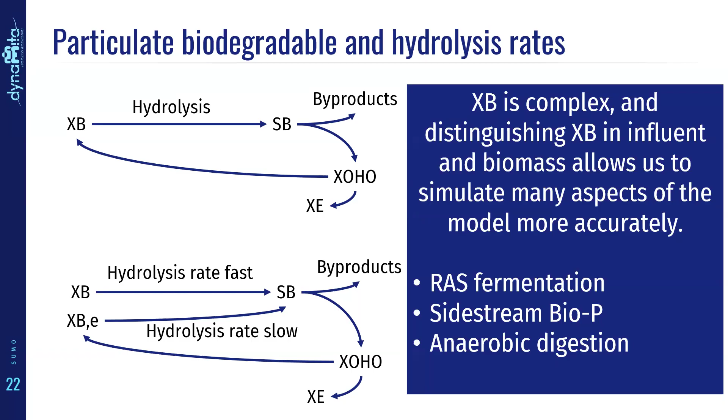And what does this allow us to do? It allows us to distinguish between the two types of XBs which are part of the wastewater, one in the influent and the other generated by the biomass, because XB in itself is quite a complex organic molecule. And it allows us to simulate RAS fermentation, sidestream Bio-P, and anaerobic digestion more accurately, specifically if you're dealing with only primary sludge, only waste activated sludge, anaerobic digestion, or a combination of the two.

The next update we have done is regarding PdN, or the partial denitrification model, which has been introduced. Recently, there has been a paradigm shift in how we do nutrient removal, specifically focusing on anammox. We used to look at NOB out selection, or nitrite oxidizing bacteria out selection, as a viable pathway, where we would convert ammonia to nitrite, and then nitrite and ammonia would be used by anammox and converted into nitrogen gas.

With the partial denitrification pathway, we let the complete nitrification go forward. So we don't necessarily wait for just nitrite in a complete nitrification cycle - we don't do partial nitrification. We let it go complete, and then we add a little bit of COD to form nitrite. This nitrite, along with ammonia, is then available for anammox for growth and removal. So we are basically preventing the nitrite to nitrogen gas conversion through a heterotrophic pathway - nitrite reduction through a heterotrophic pathway is prevented.

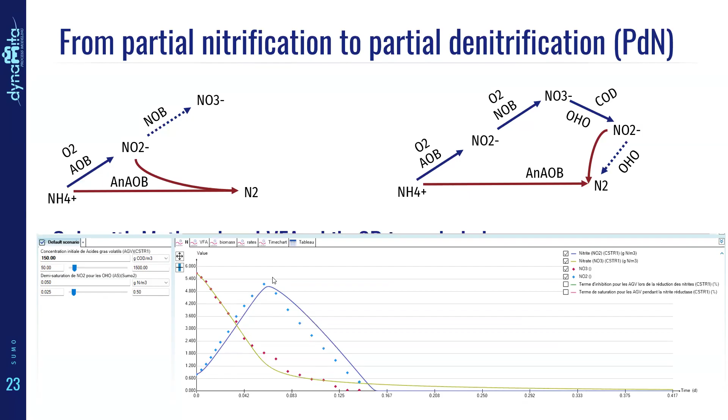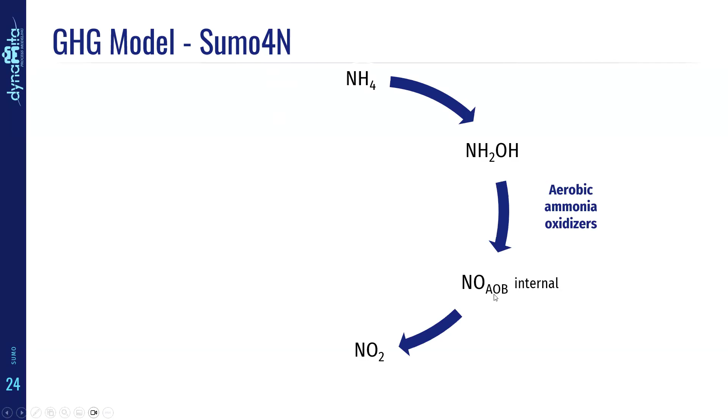And finally, I want to touch a little bit on the greenhouse gas model, which is the SUMO4N model. In the greenhouse gas model, it's a 4-step nitrification denitrification model where the ammonia is converted to hydroxylamine. And then we have nitric oxide, which is internally generated as a state variable, which converts to nitrite. The NOBs will convert nitrite to nitrate.

And then ordinary heterotrophs or OHOs will play a role in denitrification from nitrate to nitrite. And then again, we have nitric oxide generated internally by heterotrophs before nitrous oxide is released. So there is a nitrifying pathway by nitrifiers, and then there is a denitrifying pathway, which allows for nitrous oxide emission. And recently, we have introduced abiotic oxidation as well as part of the greenhouse gas model. Some of the model references are available on our Wiki page, and more information about the model can be accessed from there as well.

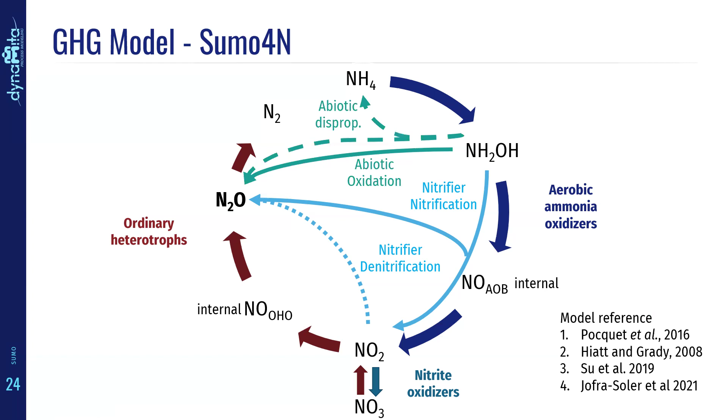And finally, a few lines about the sludge densification add-on. So if I go back to the Wiki page for a second, if I go to home, what's new in SUMO24? So like I said, more information can be accessed about the new features, new process units, new tools, and then new add-ons. So the densified sludge add-on allows us to simulate densification or granulation of sludge when a cyclone is present as part of the configuration.

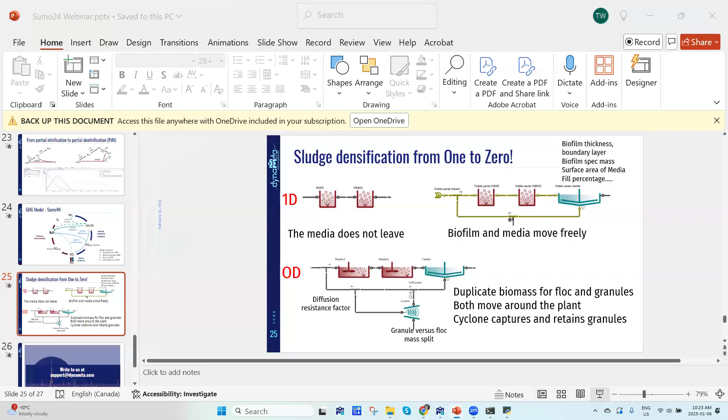And I want to just talk about the difference between the biofilm model and the new add-on, which is the sludge densification add-on. So in the biofilm model, we have the MBBR, which is a one-dimensional biofilm model. The media does not leave the reactor. So you can imagine that there is a screen as part of each of these reactors, and the media stays in.

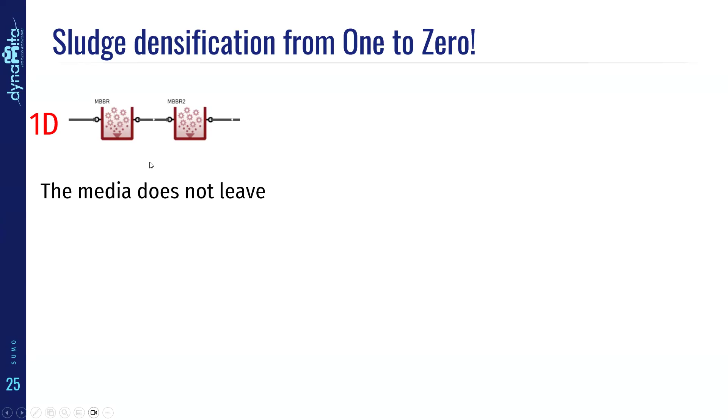We have another add-on called the mobile carrier add-on, in which the media is actually free to move along the whole plant. So the biofilm and the media move freely through the plant. Again, that's a one-dimensional model as well. And now what we have introduced as an add-on is a 0D model. In a 0D model, you would set up a configuration like we just did, except choose a sludge densification model as a biokinetic model, and then add a cyclone.

Now, what this cyclone allows us to do is to capture granules as they grow in the system. We have duplicated the biomass. So there is an OHO for floc, and then there is an OHO for granules. There are AOBs or ammonia oxidizing bacteria for floc, and then there are ammonia oxidizing bacteria for granules. And as the wastewater flows through, the cyclone works to capture granules and lets the floc pass out and allows you to simulate the sludge densification process.

And the important parameters which are involved in a 1D model are a big list of parameters such as biofilm thickness, boundary layer thickness, biofilm specific mass, and media-related or carrier-related information such as surface area or fill percentage is to be provided when we are dealing with 1D. But when we are dealing with a 0D model, we have to provide just two kinds of information. One is, what is the mass split between granules and flocs associated with cyclones? And then the diffusion resistance factor, which we have introduced for biomasses that are associated with granules. And that allows us to simulate the sludge densification process.

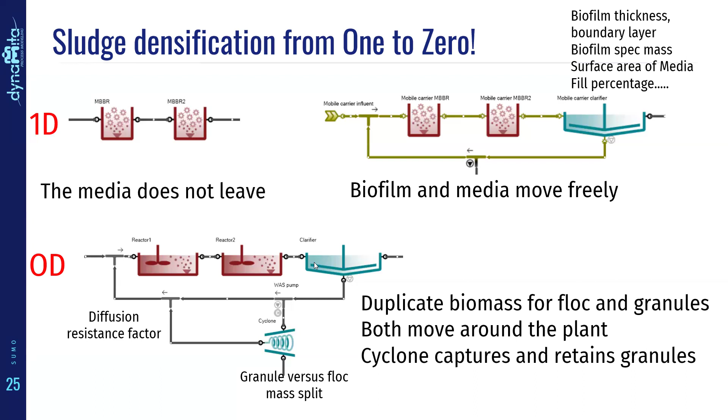All right. With that, I would end this presentation, and I would ask you guys to go to the Wiki page for more information about what we have as new process units, new models, and more detailed information about the model descriptions.